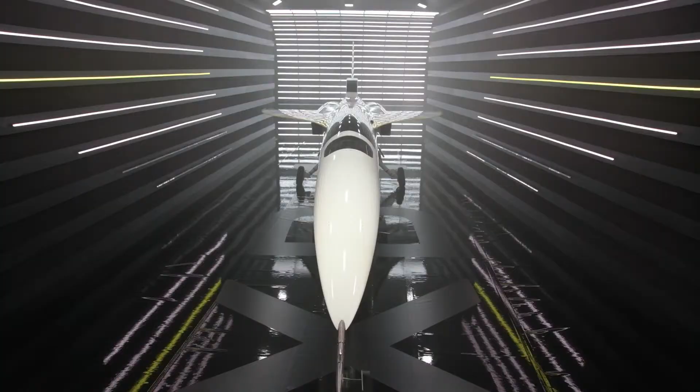Today we stand here on the precipice of a new age of travel. And I am so proud to announce: Supersonic is here. XB-1, history's first independent supersonic jet.

Every feature of this airplane has been optimized for high-speed performance, and everything we've learned from the aircraft has directly informed the design and development of our Overture. Stretching 71 feet in length, its fuselage is designed for speed, minimizing drag for supersonic performance. Its carbon composite airframe retains its rigidity and strength even under the temperatures and pressures of high-speed flight.

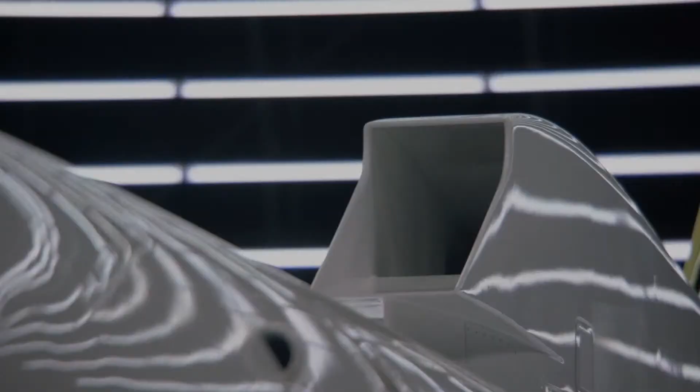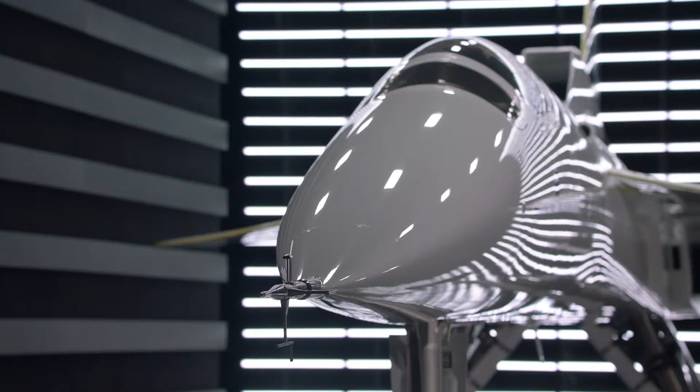XB-1's delta wing balances low-speed performance for takeoff and landing with high-speed efficiency. 3 J85 engines designed by General Electric propel it to breakthrough supersonic speed. Its ergonomic cockpit was designed with our test pilots in the loop, with hundreds of hours of human factors analysis and usability testing. Its nose, where the air first meets the airplane, has a refined shape to generate the precise vortex flow to ensure stability across a wide range of airspeeds.

I'd like to introduce two people who have helped us tremendously along the way: LinkedIn co-founder and early Boom investor Reid Hoffman, and Lockheed Martin former Chief Technology Officer Dr. Ray Johnson. Boom is the first private company to design, develop, and build supersonic travel.

XB-1 sets the foundation for Overture's development. We are now back to the modern future, where supersonic travel is something that everyone can enjoy. The XB-1 rollout is where supersonic travel begins.

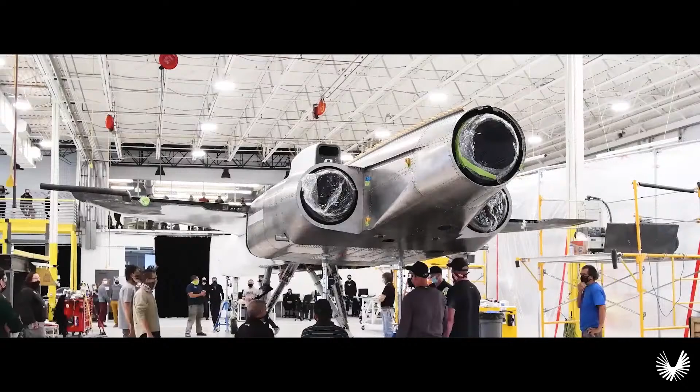The XB-1 rollout is a significant accomplishment. It represents the ability to design, manufacture, and soon fly a supersonic aircraft. Those capabilities and that experience will port directly to the development of Overture.

In the early days, people thought we were just plain crazy for taking on a challenge so audacious, especially in an industry that hasn't seen a new commercial aircraft startup in nearly 100 years. We've become a magnet for great people. At Boom, I'm incredibly proud that we've assembled a team of nearly 150 people with experience from places like Gulfstream, SpaceX, NASA, and Amazon.

We've done hard things before, and our aim for Boom is to be the place where the most talented innovators on the planet can be inspired to do the best and most meaningful work of their careers.

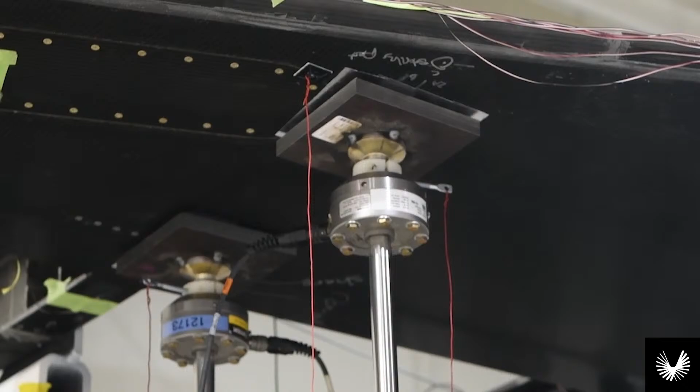XB-1 team's tireless effort of tens of thousands of hours of design, development, and meticulous testing. We have a saying at Boom: you have to be naive enough to start, but wise enough to finish. And we've overcome so many setbacks and roadblocks along the way. XB-1 represents a breakthrough in high-speed efficiency that will change the way we all fly.

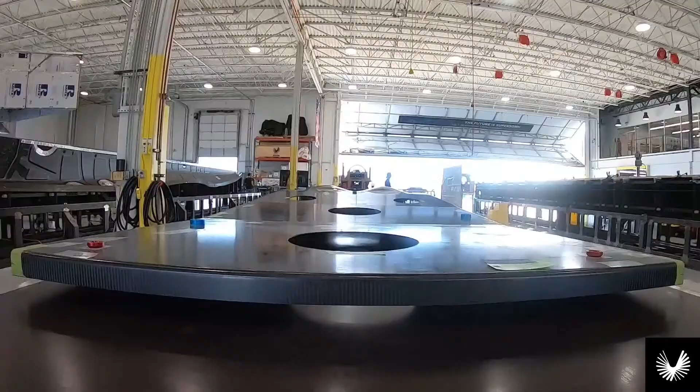And to build this aircraft, we're standing on top of half a century of progress in fundamental aerospace technology, from carbon fiber, from wind tunnels to computer simulation, and we've completely changed the way we design and build jet engines. XB-1 brings these technologies together, and ultimately, it will change the way we experience the planet.

I'm incredibly proud of the team that has made this happen, and when XB-1 takes to the skies next year, it will be history's first independently developed supersonic jet.

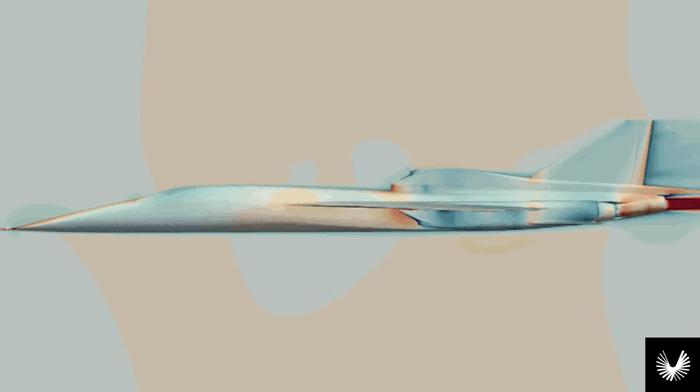If these models look fast, it's because they're designed to be fast. The faster the aircraft travels, the more drag it experiences. You can offset this with greater engine thrust, but that comes with increased fuel burn and therefore cost and emissions. At Boom, we aim to create a sleek, lightweight design that minimizes drag to the greatest extent possible, and therefore cost and emissions.

In the 60 years since Concorde was developed, there have been several key advancements in technologies that make this possible: aerodynamic analysis, strong lightweight materials, and propulsion. Aerodynamics present the greatest challenge in achieving a successful supersonic design, and that is meeting your performance, handling, and efficiency goals.

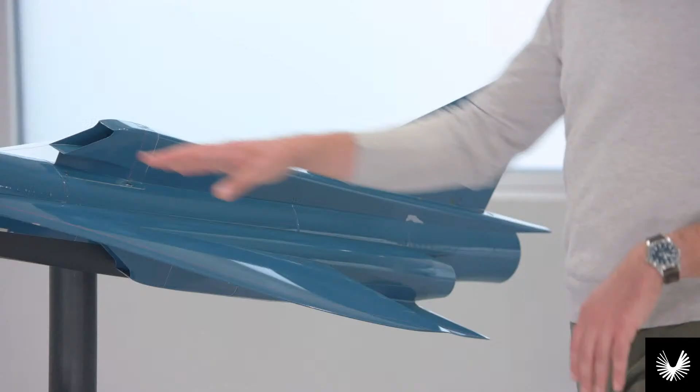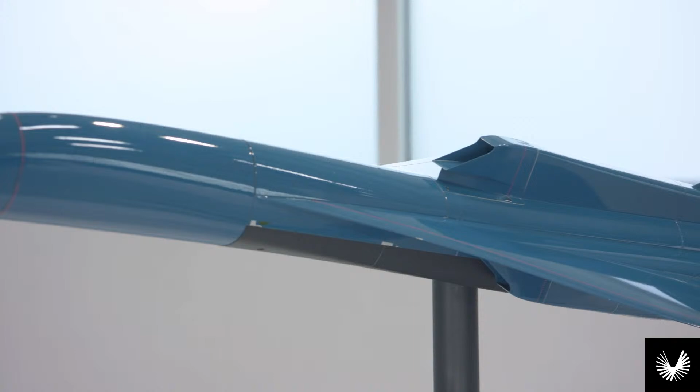while ensuring safe operation at the low speeds required by takeoff and landing. Specifically, the long, slender fuselage, narrow, highly swept wing, and aggressive inlets designed to slow the oncoming supersonic air to the subsonic speeds that the engines require. These features, however, tend to have detrimental effects on low-speed flight characteristics. For that reason, many iterations are required to close on a design that enables safe and efficient operation at both high and low speeds.

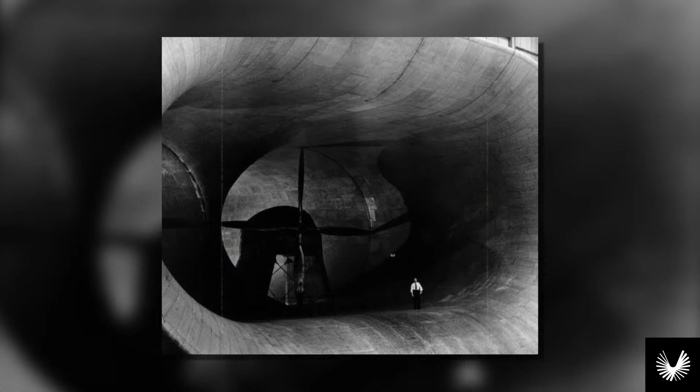Concorde engineers honed those designs through extensive wind tunnel testing, which is both costly and time-intensive. Today, using advanced fluid simulation, high-powered computing, and digital design tools, we're able to reduce the iteration time from months to days. And while it's still important to validate our designs through wind tunnel testing, computer simulation has enabled us to reduce that effort by orders of magnitude.

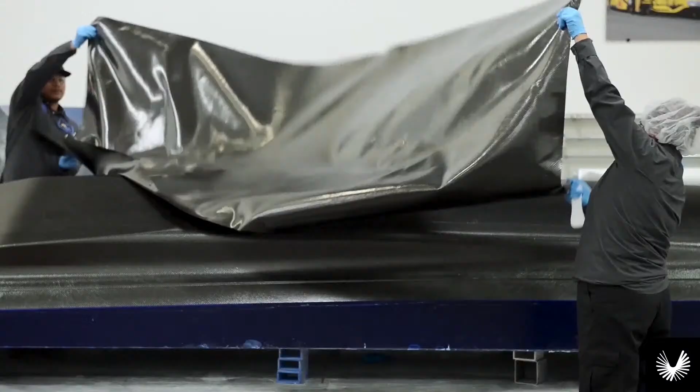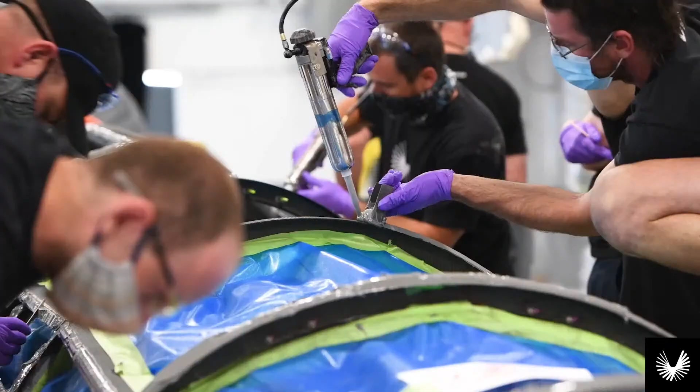Next, XB-1 is primarily constructed of carbon fiber composites. These materials are commonly used in the aerospace industry. First, you're able to create large parts that are easily molded to the complex shapes that our aerodynamic design demands. Second, you can then tailor those parts to be strong in the necessary areas and to account for the expansion and contraction associated with the temperature changes that are experienced during supersonic flight.

By contrast, Concorde, which was an aluminum aircraft, grew by over a foot at max speed, and the SR-71 leaked fuel on the runway until its titanium skins could come up to temperature and seal the tanks. By using carbon fiber composites, we all but eliminate these concerns and therefore reduce structural complexity and the associated weight.

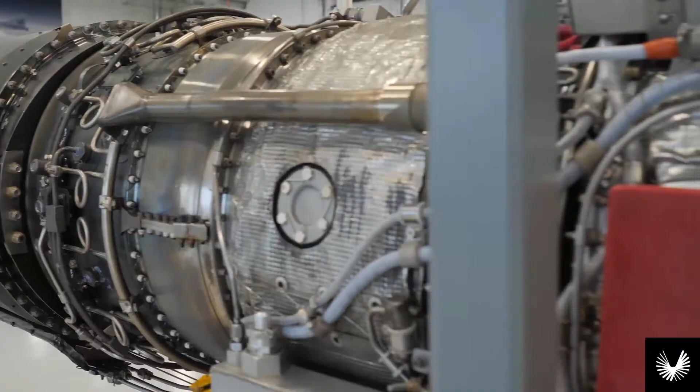together into a harmonized design, to solve the complex, difficult problems associated with new aircraft development, and to develop the tools and processes that will carry forward to our commercial program, Overture. But most importantly, it's driven the creation of a team that can solve complex, multidisciplinary problems across the design, build, and test phases of new aircraft development. I am incredibly proud of the team that we've assembled and what they've accomplished with our plane, XB-1.

To tell you more about the build of the plane, I'm going to introduce you to Mike Jagemann, Head of Manufacturing. Thank you, Greg.

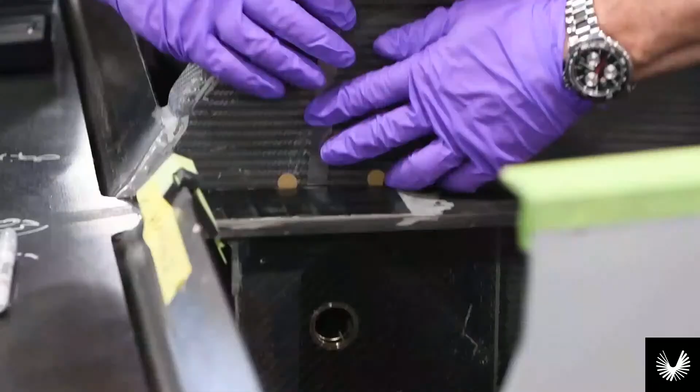I'm Mike Jageman. I lead the manufacturing of XB-1. The build process of an aircraft is considered from the very earliest phases of design. As Boom's 7th employee, my job was to bring advanced manufacturing technology to the design process. I worked closely with Greg's team to make sure that our designs were producible and manufacturable with the available technology.

We built our team with a few fundamental philosophies in mind. First, get it right in design. 80% of an aircraft's cost is locked in the design phase. Second, plan early and plan often. You cannot start design reviews too early, nor can you have too many of them. Manufacturing feedback during the design process makes for a better final product.

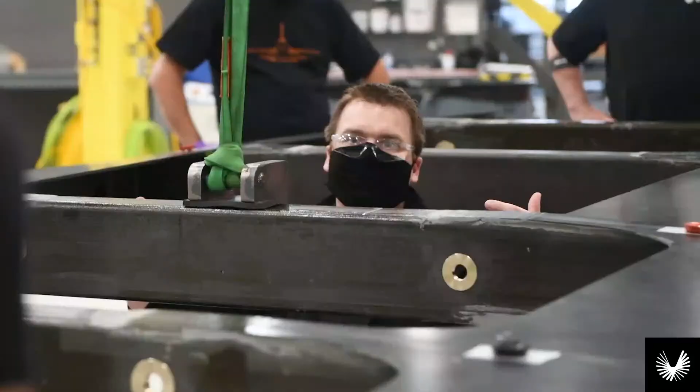And third, don't wait until tomorrow to solve a problem. If a challenge arises, do not kick that can down the road. As I tell the team, don't wait until later to fix it, because later never comes. These philosophies help us save time and cost at every point along the way.

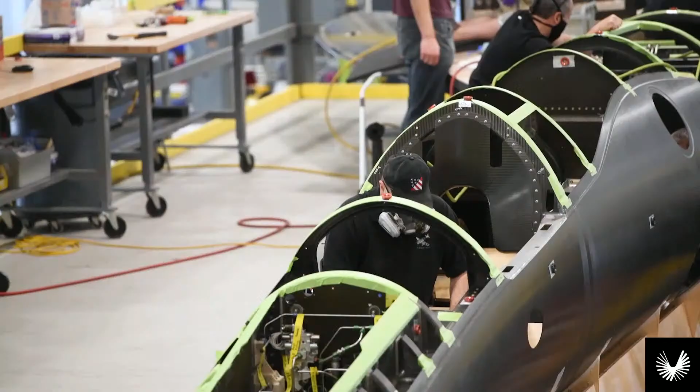I like to say that building an airplane is like eating an elephant. You take it one bite at a time. We built up XB-1 systematically by breaking each large component into subassemblies. Let's take the forward fuselage for example. It consists of the cockpit, systems bay, and landing gear bay subassemblies. Each of these large assemblies was built up separately and installed into the airframe when complete.

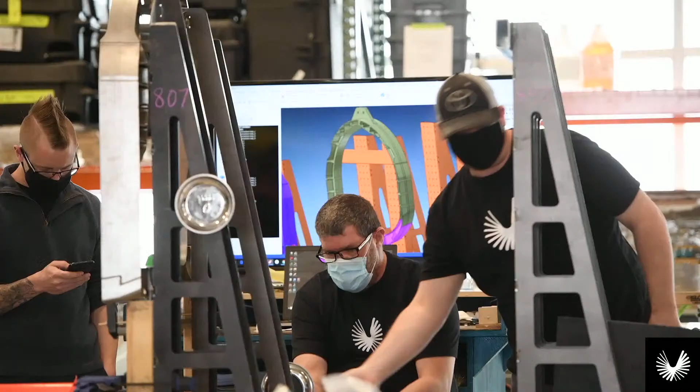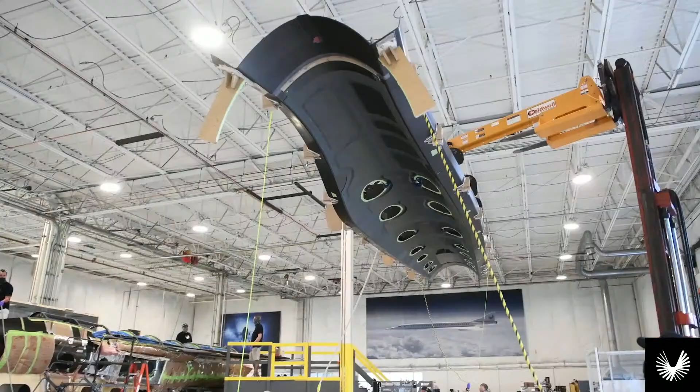We use high precision metrology tools like laser trackers and measurement arms. These tools allow us to hold measurements within the width of a human hair. With our processes and tools combined, structures like the forward fuselage came together with a high level of efficiency and accuracy. Throughout the build, we're also testing to burn down risk and maximize safety.

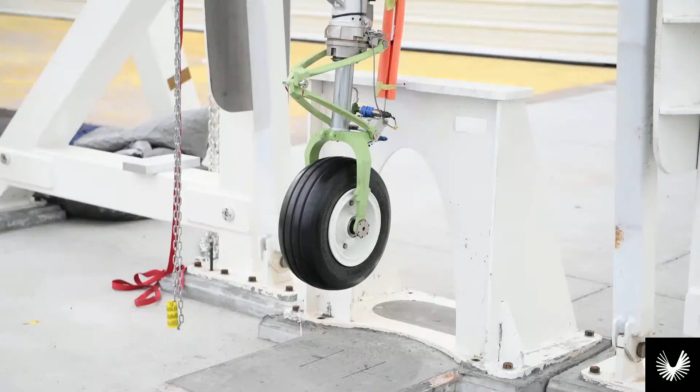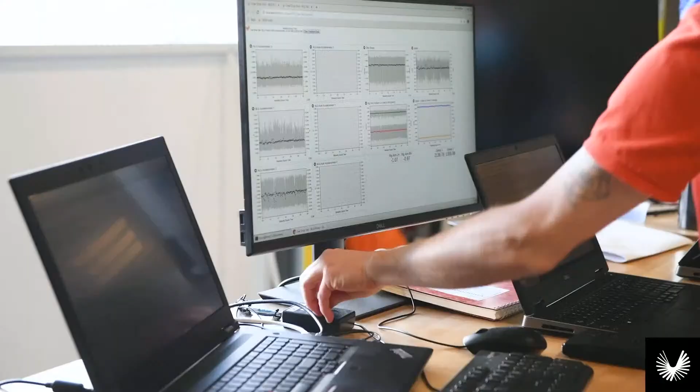We pushed components like the nose landing gear, wing structure, and vertical tail to their limit loads, meaning they successfully met requirements for strength and durability under the most extreme flight conditions. The wing structure, as an example, can carry 60,000 pounds of load in flight.

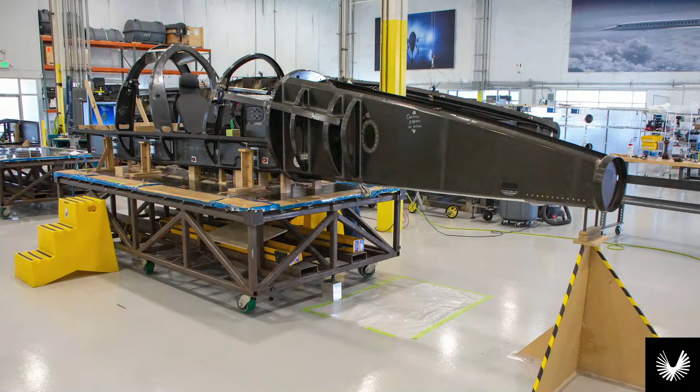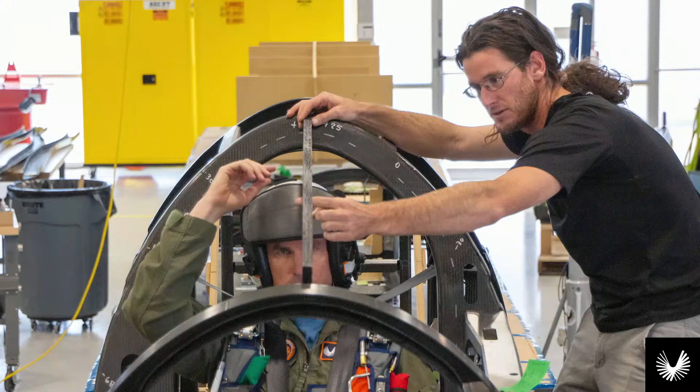And for other parts, like the cockpit, we verified the design by bringing in the pilots when it was just a skeleton. In doing so, we ensured it was ergonomically shaped just for them. Everything from rudder pedals, safety harness, and instrument layout is optimized for their access and visibility.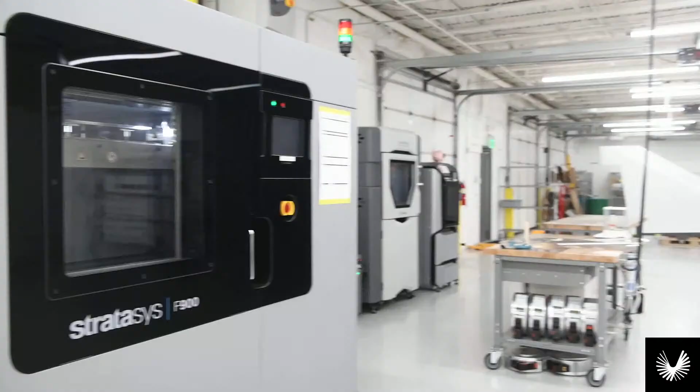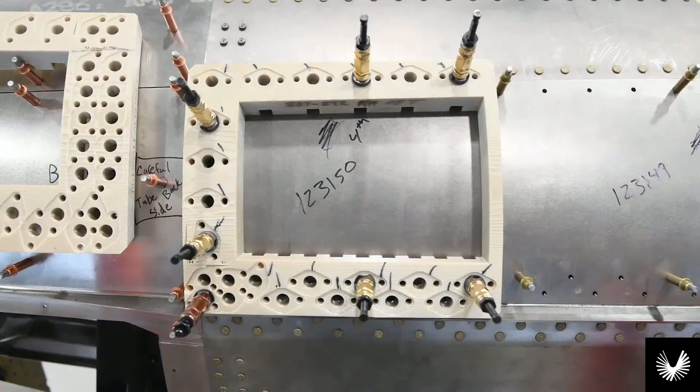At every opportunity, we made a point to be smart about how we developed each component. Thanks to our partnership with Stratasys, a global 3D printing leader, we can both rapidly prototype and build flight hardware right here in our hangar. What used to take tens of thousands of dollars and weeks of time has been reduced to an overnight task at a fraction of the cost.

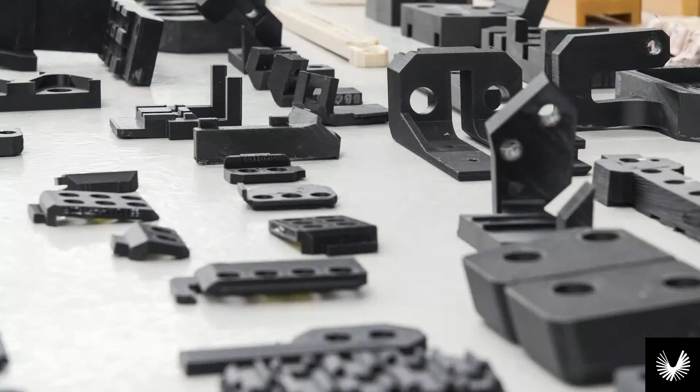We can start a print job at the end of the day, and that part will be ready to be tested or assembled the next day. Whether it's the thousands of drill blocks or the actual flight hardware that we have produced, 3D printing has saved us valuable time and money.

At Rollout, we're celebrating the handoff of XB-1 from the design and build phase into the test phase of the program. I am so proud of this team's hard work and dedication. We are so excited to see XB-1 fly for the first time.

The Boom team's been working extremely hard over the past couple years to design and build XB-1. We won't know if the aircraft performs to expectations until we actually fly it. The role of the flight test team is to take XB-1 supersonic as safely as we possibly can. We've got a number of tools to do that. One is a build-up approach, where we take what we've learned from the previous flight and plan the next flight using that information. We'll start with a small, well-understood part of the envelope and build from there.

Another tool that we have is the simulator behind me. The simulator takes the latest information about XB-1 and gives the pilot a preview of how the aircraft's going to handle in flight. But it's not just the pilots that are going to make XB-1 safe. We're supported by a team of maintainers and flight test engineers. We'll include them in the rehearsals by linking the simulator to the control room.

Any pilot will tell you that a simulator can only represent the real world so well. In order to get a real world flavor prior to first flight, Doc and I will fly high performance aircraft like the F-5 and F-104. While not a perfect simulation, they'll let us hone our skills prior to the first flight. The simulator has two primary purposes. The first is that of an engineering design tool, and the second is that of a training tool for both the pilots and the control room.

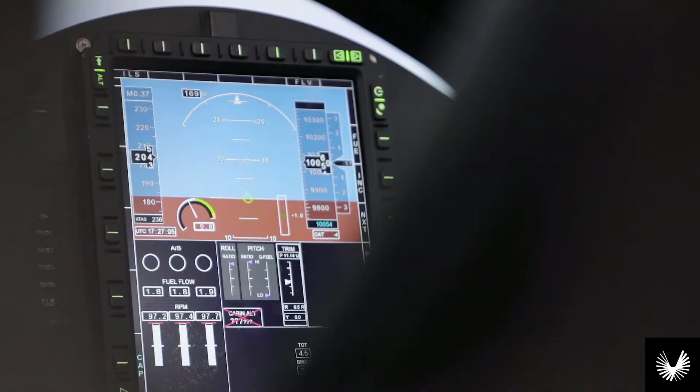We built this simulator in order to test and get an early preview of the displays, the switch layout, the flight controls, and the view the pilot has out of the nose of the aircraft. This is version 2 of the simulator for Boom, the highest fidelity version of the cockpit outside of XB-1 itself.

That allows us to run full rehearsals with the entire control room and get a true feel for how the entire envelope expansion will go for XB-1. As the Chief Flight Test Engineer, I'm responsible for keeping Doc and Duff safe in the aircraft by leading the control room team on the ground. Just like you've seen on NASA spaceflight missions, we have a control room to help ensure the safety of our aircraft. The difference is the engineers in our control room are the same ones who designed and built the aircraft, so they know it like the back of their hand.

I'm currently taking our team of 30 engineers through a comprehensive training and rehearsal program. The objective is to make sure they're prepared for safe flight tests and everything happens efficiently. By the time we get done with the training program, they'll have probably seen the first flight over 100 times. During the training, I'll give them different scenarios where they'll have to respond to a problem and come up with a solution.

As an example, I may increase the temperature on a flight critical component of the aircraft beyond its maximum value. They'll have to figure out how to safely recover the aircraft. By the time we're done, the engineers should be ready for just about anything, ensuring that we have a safe first flight that goes exactly as planned.

One of the reasons we train so much is that XB-1, like any supersonic aircraft, has some unique handling qualities. In order to be efficient at high speed, XB-1 has a narrow wingspan, and one consequence is that on the approach to the runway, XB-1 is pretty fast and has a pretty high angle of attack, meaning the nose is well above the horizon. This can make it difficult for the pilots to see the runway.

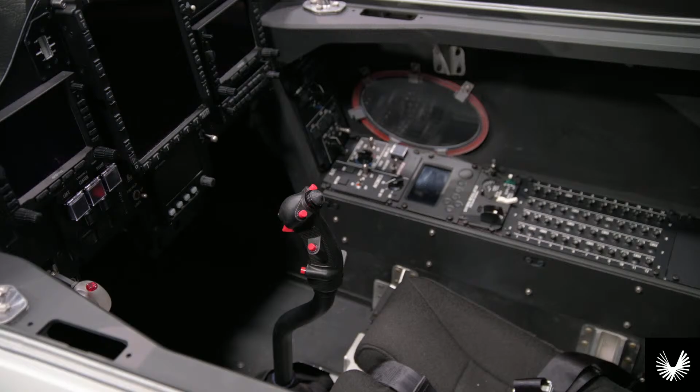Throughout the entire program, the role of the test pilot is that of the skeptic. It's our job to constantly challenge and question every engineering design decision in order to ensure we have the safest aircraft possible by the time we enter flight. As we enter engine runs and taxi tests, however, we'll start to trust the aircraft and believe it's truly safe to go fly. At this point, that crucial role of the skeptic must be filled by someone else.

We will purposely transition that role to the chase pilot, the other test pilot in the program who will be airborne with us on every single mission. They will help us safely execute the entire envelope expansion.

When it comes to decision making, our varied flight test experiences and backgrounds is one of our strongest assets. Between the 3 of us, we've attended 2 different test pilot schools, we're in 2 different branches of the military, and we've flown everything from helicopters to high-performance aircraft. When we have to make a decision, we'll sometimes approach it from different perspectives, but always with the same fundamental mindset of maximizing safety and minimizing risk to the program.

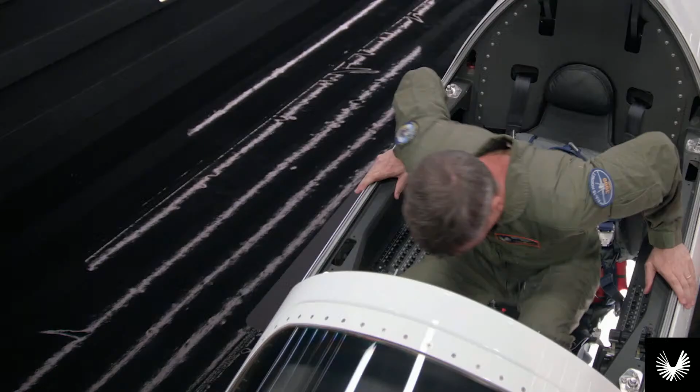It'll all come together in the desert over Mojave in the very near future. The first flight of XB-1 will be a historic event, just like the historic first flight of the Bell X-1 many years prior. We're looking forward to accomplishing that milestone and can't wait to share it with all of you in the next year.

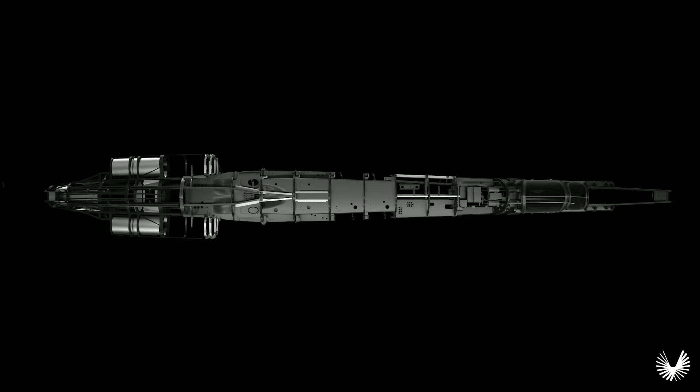I'm Julie Volk, and I lead programs and operations for XB-1 and Overture. As Blake mentioned, our goal is to build a supersonic airliner that carries passengers across the world. So why build a test aircraft with only 1 seat? Well, it's pretty common in large advanced airplane programs to use a test aircraft. The XB-1 is a one-of-a-kind aircraft designed, built, and optimized to gather learnings for Overture. We kept this top of mind as we developed the program, using advanced engineering and state-of-the-art materials, manufacturing, and assembly processes.

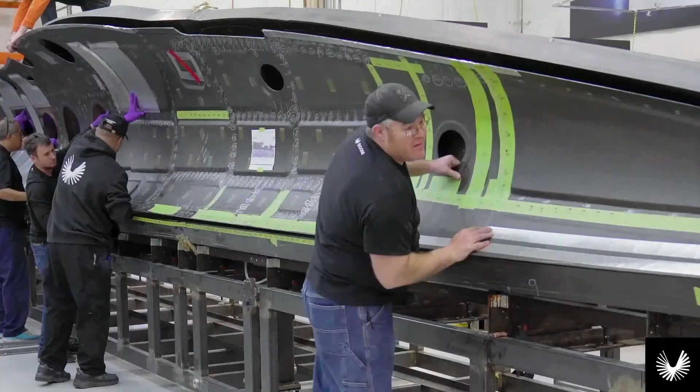There are 4 key ways XB-1 supports Overture: our processes, design, sustainability, and relationships.

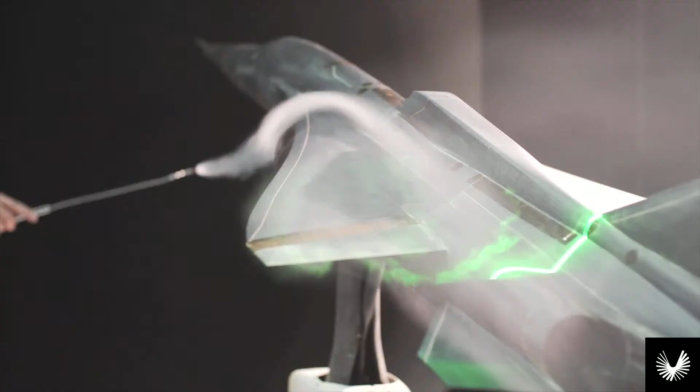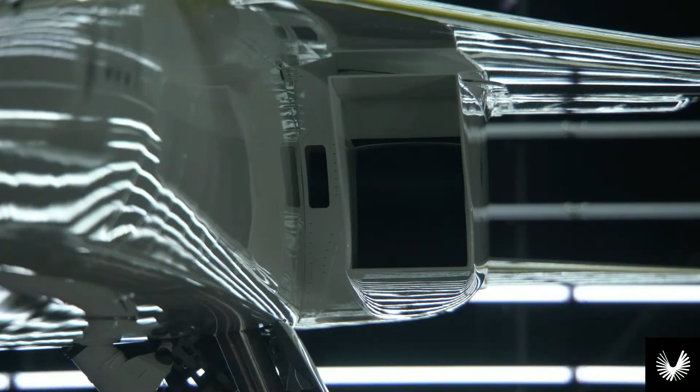Let's talk about our processes first. We built an aerodynamic analysis tool that we use to optimize our performance across the flight envelope, including supersonic and subsonic conditions. We will continue to refine our engineering tooling as we go into the flight test program in Mojave, where we will calibrate our inlet design and verify its performance, optimize our flight control augmentation system, and validate the aerodynamic analysis tools I described earlier.

Next up is supersonic design experience. What is unique to designing a supersonic aircraft is that every engineering decision has a very strong interdependency on another part of the plane. For example, when you design the shape of the plane, it directly applies constraints to the systems within. Now we have an engineering organization that's proficient in supersonic design and understands the multifunctional impacts of every engineering decision.

In regards to our sustainability initiatives, we prioritize the design that would maximize fuel efficiency. Just like in your own car, an aircraft's fuel efficiency directly translates to how sustainably it operates. We're using the learnings from the XB-1 flight test program in Mojave to ensure Overture is as efficient as possible. From day one, we will have a net zero carbon flight test program.

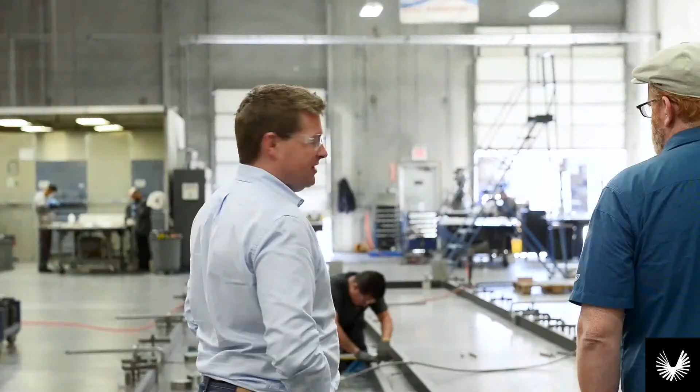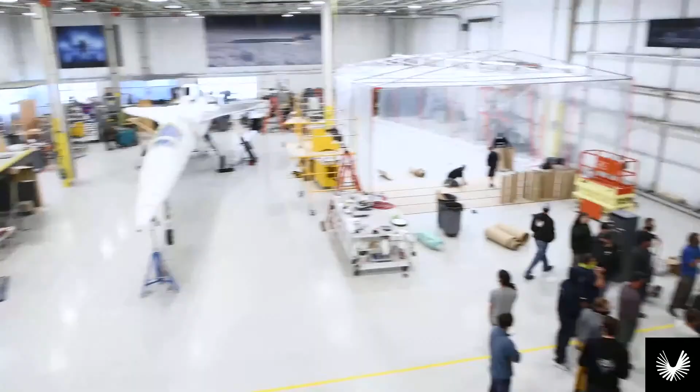We've now shown the world that we can turn a paper plane into a physical build, and this demonstrated ability has opened doors for Overture partners, suppliers, and customers. We've refined the perfect balance between startup creativity and advanced industry innovation. We're smarter, faster, and more connected as a team thanks to the XB-1 program. We take great strides to learn from every aspect of history, and we've sought advice from groundbreakers that came before us. One great example of that is NASA's space program.

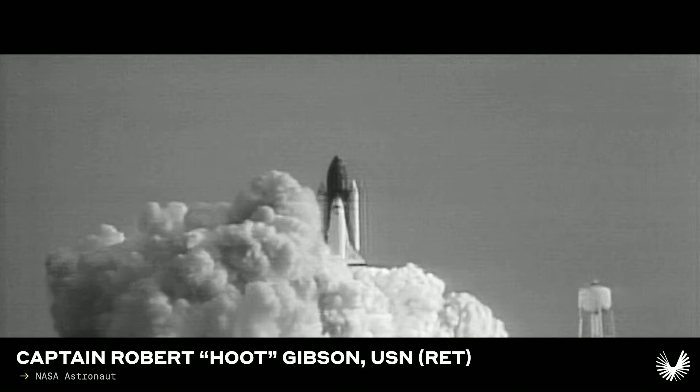We at NASA were in pursuit of making space more readily available. We sent so many people to space in those years aboard the space shuttle. That's what Boom is about to do with the rollout of XB-1 today.

Boom is going to pave the way for supersonic airliner travel. Boom is about to bring out a prototype that should fly next year and put us on a good trajectory toward eventually getting to Overture and supersonic flight around the world for people like you and me. It's going to revolutionize air travel, and it's going to be an unforgettable experience for all of them. It's not a mock-up, it's not a drawing on a board, it's actually a flight vehicle.

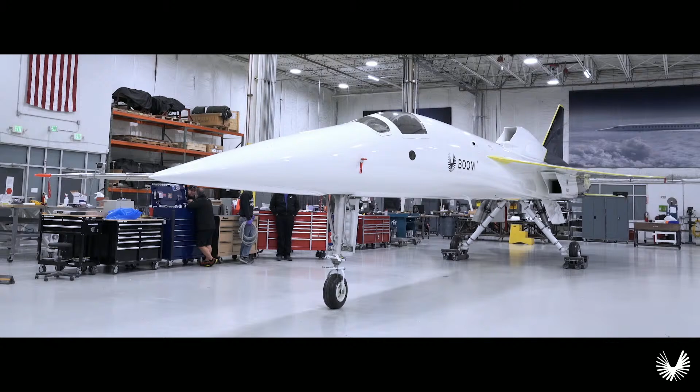Over the space of 18 years as a space shuttle astronaut, I got to work with a lot of very highly qualified, very experienced and technical people, and I see the same thing at Boom that I got to see at NASA over all those years. I found the same level of enthusiasm, dedication to mission that I had seen in the Marines for 34 years and also at NASA during the 20-plus years I was privileged to be a member of the NASA family.

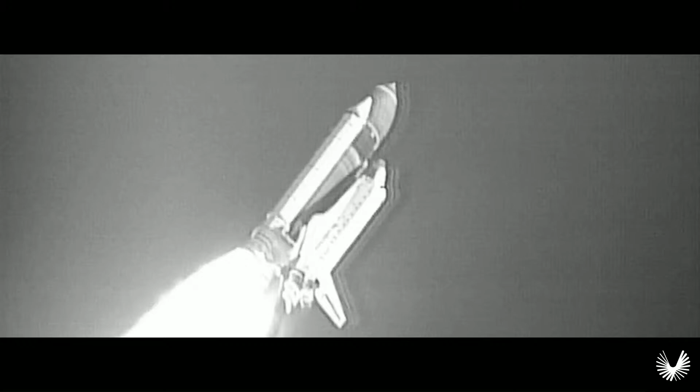It was focus on mission, dedication to doing something that was going to make life better for people here on the planet, and that's what really excited me about Boom.

As you can tell, we love airplanes and the technology that makes them possible. But our pursuit of speed runs deeper. It's about how we as humans experience each other and the planet. When airplanes fly twice as fast, we'll all be able to experience more of the world's people, places, and cultures. All of us have a story about how removing the barrier of time will allow us to connect better with the people who matter most.

And for each of us at Boom, there's a personal reason that drives us forward towards our mission. I'd like to introduce a man equally passionate about how airplanes are built and how they improve our lives, our Senior Vice President of Overture, Brian Durrance.

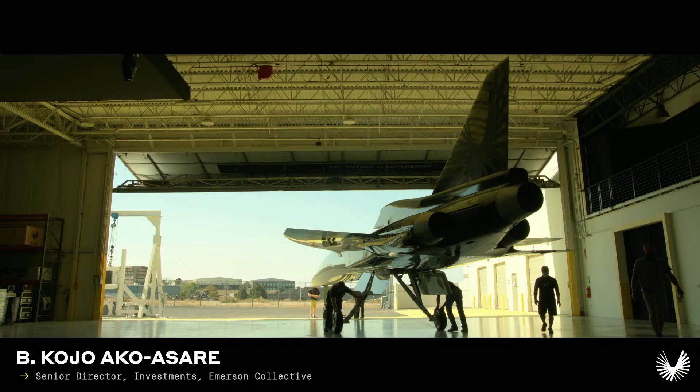It's a company that's led by folks that have grown up in an environment that's very, very respectful of sustainability. So it's been refreshing to really see a company that embraces sustainability. From day one, Boom has understood the opportunity that their products represent in demonstrating the viability of sustainability in air travel. They've incorporated the ideas and concepts of sustainability into the Overture program, and most recently, they have pledged that both the flight and ground testing of the XB-1 will be carbon neutral.

We've built relationships in the sustainable fuel supply chain, including with Prometheus Fuels. Prometheus Fuels removes CO2 from the air, so that when you use these fuels, they don't add any CO2 to the atmosphere, they don't contribute to global warming, truly renewable fuels. And our goal is to make the future of supersonic flight carbon neutral. The renewable energy is there, and we now have a path via which we can use sustainable alternative fuels.

So at Boom, we are building the world's fastest airliner, and there are unquestionable benefits to speed for society. But we don't think speed has to conflict with sustainability. These two things can be compatible. We enjoy the benefits of speed, but we're also making sure to be good stewards of the planet at the same time. Overture will set a new standard for travel and change the way we think about distance.

We're looking forward to flying our first passengers within the decade. And to get there, let's talk about Overture's roadmap. For years, Boom has been a two-aircraft company. As XB-1 was being tested and developed, part of our team was working on Overture's conceptual designs. And when XB-1 begins flight testing next year, the Overture team will be conducting wind tunnel testing to validate those designs. And as we finalize Overture's airframe, XB-1 will be breaking the sound barrier.

By 2022, we'll be breaking ground on Overture's new production facility, where the first aircraft will be built and rolled out in 2025, followed by an extensive test and certification program. With many exciting technical developments to come, we are eager to bring the benefits of supersonic flight to market and look forward to seeing you on board.

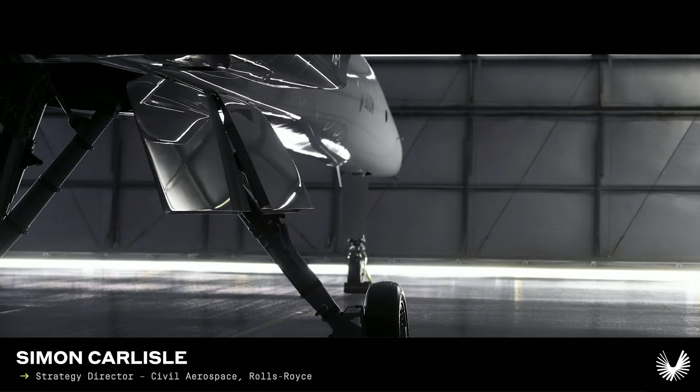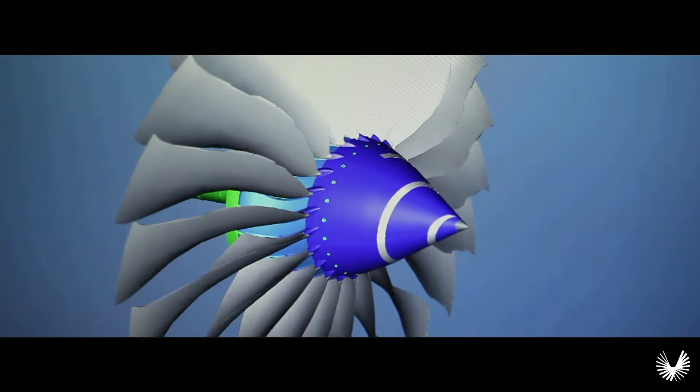Hi, my name's Simon Carlisle and I'm Strategy Director for Rolls-Royce Civil Aerospace. It's a great occasion for Boom and we're really excited to be able to see a new aeroplane fly. We believe at Rolls-Royce that our combination of experience borne out through Concorde, our unique technologies, and our commitment to a sustainable future uniquely position us to help Boom develop this aircraft in a way that can bring real advantage to aviation and give passengers optionality around supersonic travel.

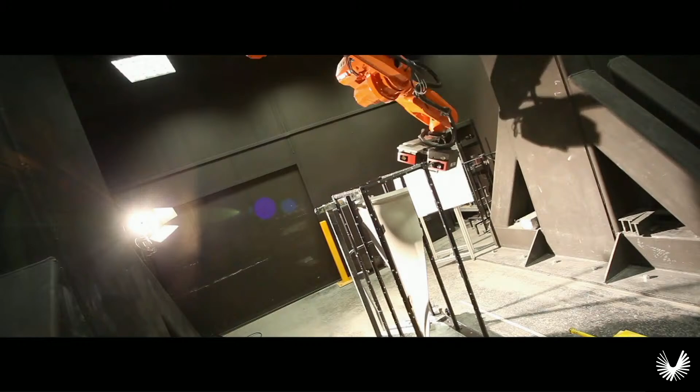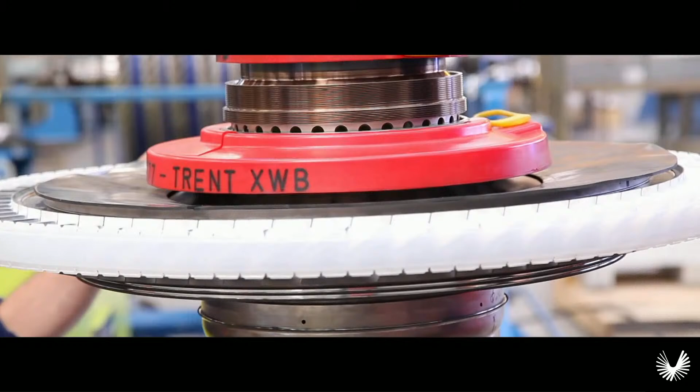Sustainability is a really big issue for aerospace at the moment, with lots of companies focused on how they can improve the amount of CO2 generated by our products. At Rolls-Royce, we're really committed to having net zero by 2050 for all our products, both existing ones and the ones in the future. That will be achieved through a combination of different activities: the application of new efficient technologies, the use of sustainable aviation fuel, and the use of other power sources to reduce reliance on carbon fuels. Supersonic travel can be part of that value proposition that aviation offers to the globe in general, and we believe there are lots of benefits that can come from developing the technologies associated with supersonic travel. So my congratulations to everyone at Boom.

I'm really excited to see XB-1 fly. This is a big deal. It's always a big deal in aviation when a new aeroplane flies. I look to the future and take enormous pride in what you've achieved so far. There's lots of hard work to come. Rolls-Royce is going to be here to work with you through that.

Thank you very much. Thanks, Simon. We're thrilled to have you and Rolls-Royce as partners.

When passengers hear about Overture, the first question they ask us is, what will it be like to fly supersonic? High-speed airplanes fly at higher altitudes, and Overture cruises at up to 60,000 feet. At those altitudes, you're flying above most weather and turbulence, giving you a smoother ride. At the same time, you'll experience a unique view: you can see the darkness of space above and the curvature of Earth below.

Today, flying can be so stressful, but we're designing Overture to give you a sense of tranquility from the moment you step aboard. During your flight, you'll experience an environment crafted for productivity and relaxation. Over the next few years, as we bring Overture to life, we'll share more about the passenger experience.